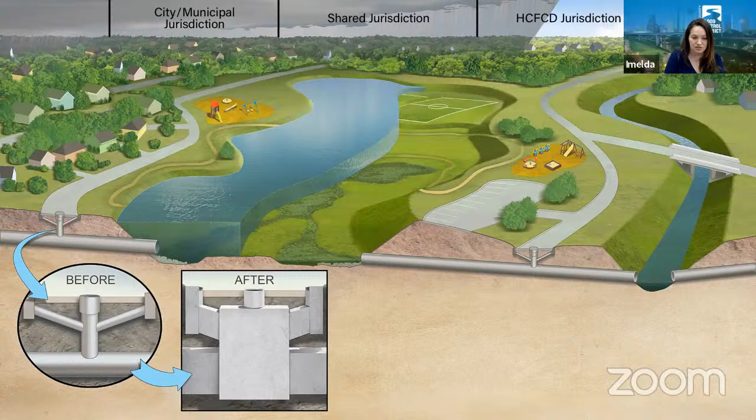In the middle is a stormwater detention basin, sometimes constructed by the Flood Control District. When storm sewers on the left are increased, this creates an increase in discharge. Since it is our policy to avoid any adverse impacts from our projects, detention basins help to safely take in and temporarily store excess stormwater during heavy rain events. Often, we partner with Harris County Precincts, Utility District, and others to add recreational amenities, such as trails to these basins and along our channels.

On August 25th, 2018, Harris County voters approved $2.5 billion in bonds for flood risk reduction projects. This vote followed a series of meetings across Harris County in each watershed, which resulted in a list of what is now 181 bond projects. As of August 25th, 2021, every project included in the 2018 bond program has been initiated, including 8 projects in the Armand Bayou watershed.

A total of more than $1.35 billion in partnership funding has been secured so far to stretch the 2018 bond program even farther. The actual timing of each individual project will depend on a variety of factors, including environmental permitting, right-of-way acquisition, and utility relocation, and in some cases, requirements of a particular grant. That said, project lists and projected schedules are updated frequently on our website.

While the bond was for $2.5 billion, the full cost of every project in the bond table is almost $5 billion. So we made it clear from the outset that we would need funding partners to fully construct the projects in the bond program. As I mentioned, we've had some success so far and have secured more than $1.35 billion in partner funds. This graphic illustrates the many sources of those partnerships, including federal, state, and local funding that the Flood Control District is working to secure for Harris County.

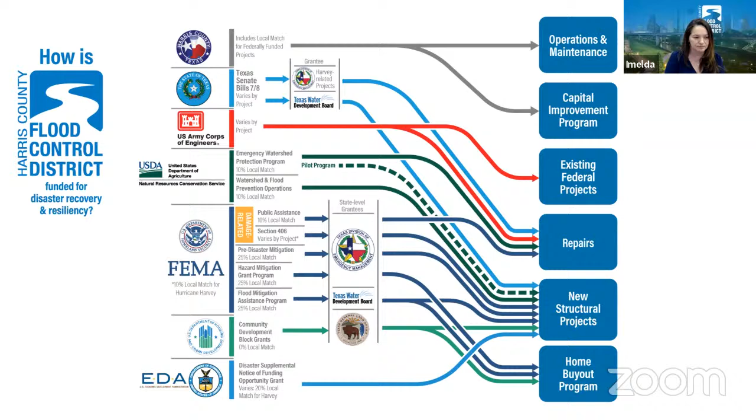Each agency has its own definition of eligible project and its own requirements for local match funding. So the Flood Control District has to work diligently to match projects to the right partnership opportunities. We will now move into the part of the program that is specifically about the Brookglen Stormwater Detention Basin project.

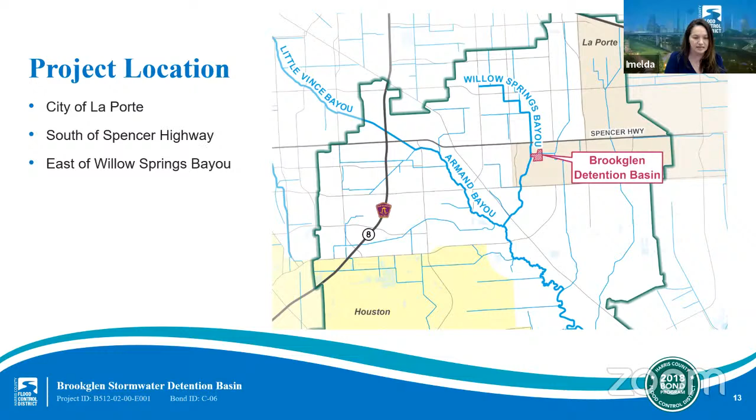The Brookglen Stormwater Detention Basin project is in the Armand Bayou watershed within the city of LaPorte, south of Spencer Highway. The project site is located to the east of Willow Springs Bayou, which the Flood Control District formally identifies as Unit B512-02. The primary objective for the Brookglen Stormwater Detention Basin is to reduce flooding in the Brookglen subdivision as part of a larger drainage plan for the area.

The basin is one of multiple projects that will be required to reduce flooding risk in the Brookglen area. These other projects include the Flood Control District's Genoa Red Bluff Stormwater Detention Basin and future channel and bridge modifications that will increase stormwater conveyance out of the Brookglen area. In addition to those projects, we are partnering with the city of LaPorte on a project that will improve the storm sewers for many of the remaining homes in this area. The detention basins we are talking about tonight will mitigate for the increased flow of stormwater from that future city of LaPorte project.

As most of you are probably aware, this project began as a voluntary home buyout area. Property was acquired from willing sellers who were assisted in moving to safer areas. Following Hurricane Harvey and with funding from the 2018 bond program, the Flood Control District conducted a study which determined a flood risk reduction project was feasible and that additional property would be needed to build one of the stormwater detention basins. The resulting Brookglen Stormwater Detention Basin project is primarily funded by a Natural Resources Conservation Service, or NRCS, grant, which was awarded in 2019.

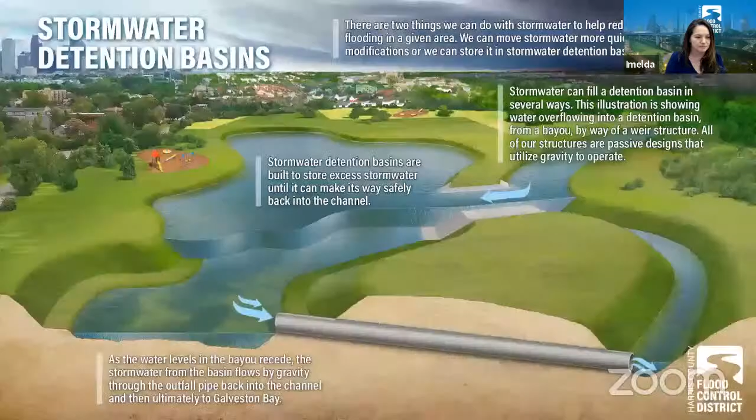Now let's take a look at stormwater detention basins to understand their role in flood mitigation. Stormwater detention basins provide storage for runoff of floodwaters. This storage is temporary and prevents water from overwhelming our channels. When channel water levels drop back down, the stored stormwater drains back into the channel by gravity via outfall pipes, which are appropriately sized to drain the basin. While all detention basins essentially function the same way, they can be designed in many different configurations.

Detention basins can be designed as either wet bottom or dry bottom. Wet bottom basins feature a permanent pool of water at the bottom of the basin. The area from the top of the water to the top of the basin's banks is what we consider available stormwater storage. Dry bottom basins feature a grassy lining and are designed to drain dry between rain events. We are designing a dry bottom basin for this particular project.

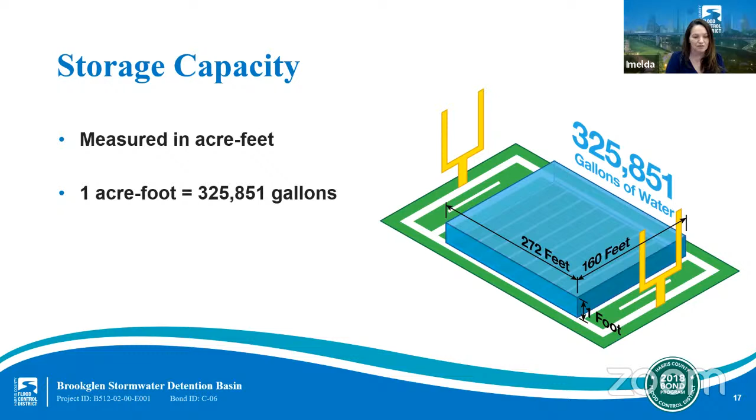When we talk about stormwater detention basins, we talk about how much stormwater they can hold in a unit of measurement called the acre foot. That measurement refers to the volume of water 1 foot deep over 1 acre. For context, 1 acre foot equals approximately 325,851 gallons of water. Think of one football field covered with 1 foot of water. With this context in mind, let's look at the design recommendations for the Brookglen Stormwater Detention Basin.

The North Compartment will provide approximately 13.5 acre feet. That's almost 4.3 million gallons of storage. It is designed to drain dry between rain events via an outfall pipe to the B512-02 tributary to the south. The design avoids major utilities and removes service connections to buyout properties.

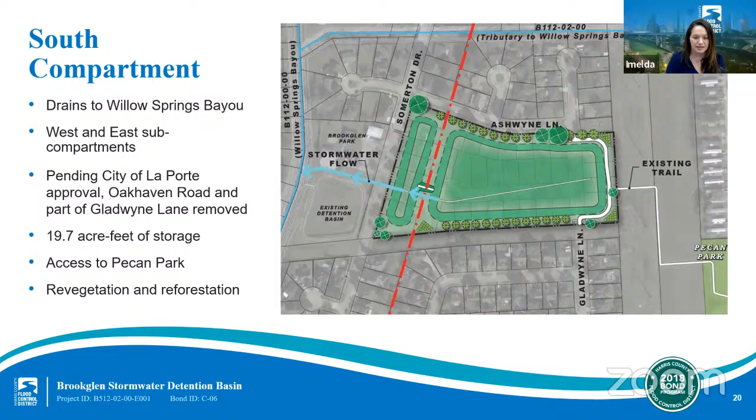This design also will include a post-construction landscape plan, which will allow for plantings to provide aesthetic appeal along Ashwyne Lane. As part of our grant from the Natural Resource Conservation Service, natural restoration of the area is a key component. So we know that this project will conclude with revegetation and partial reforestation. This will be the case for both the north and the south compartments.

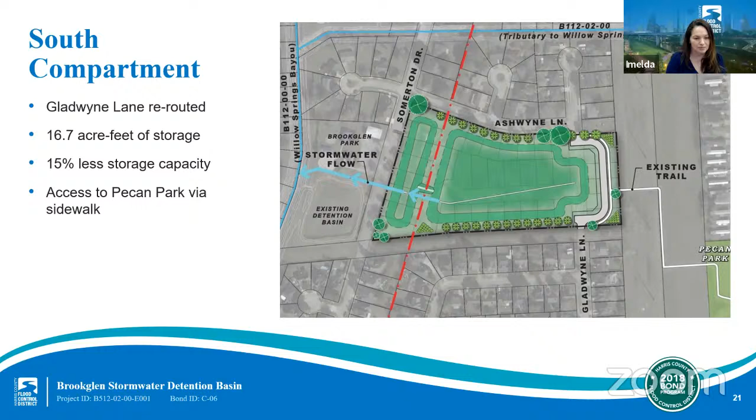In this configuration, the ability of the basin to provide significant flood risk reduction to the area would be greatly reduced. This would also reduce the effectiveness of the City of LaPorte's future storm sewer projects to further provide flood risk reduction in your area. Remember, the City of LaPorte's future storm sewer project needs these detention basins to offset for the increase in discharge that those upgraded storm sewers will provide.

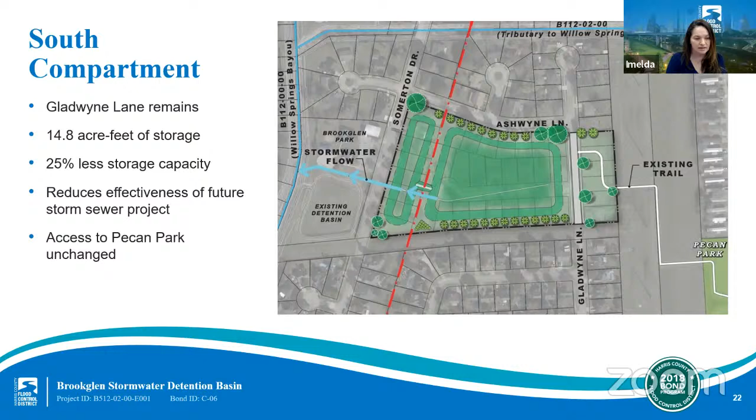With a lower detention volume, that will mean that the City of LaPorte will have to find another location for detention or reduce the scope of its storm sewer project. With Gladwyne Lane unchanged in this design, access to Pecan Park would remain the same as it is today.

I'd like to share a few words now about trails and recreational amenities. We know the Brookglen community is a very active community of walkers, cyclists, dog walkers, and others who enjoy the area's amenities. We've kept that in mind when designing the South Basin compartment and its connection to Pecan Park, and why we've called out those potential changes for you. It's important to know that the Harris County Flood Control District does not construct trails and amenities at our facilities, but we willingly share our property with entities that do.

For that reason, our standards allow us to construct the maintenance berms surrounding a basin from 20 to 40 feet wide, which is wide enough to accommodate future trail installations should a local sponsor decide to step forward to do so. Whenever possible, we are glad for our facilities to support dual purposes, flood risk mitigation and recreation.

Again, the Natural Resources Conservation Service grant we received for this project focuses on restoration. So we plan to include post-construction tree plantings to stabilize the banks, provide shade, improve wildlife habitat, and give this basin a more natural appearance. You can see representation of this restoration along the perimeter of the basin on this slide.

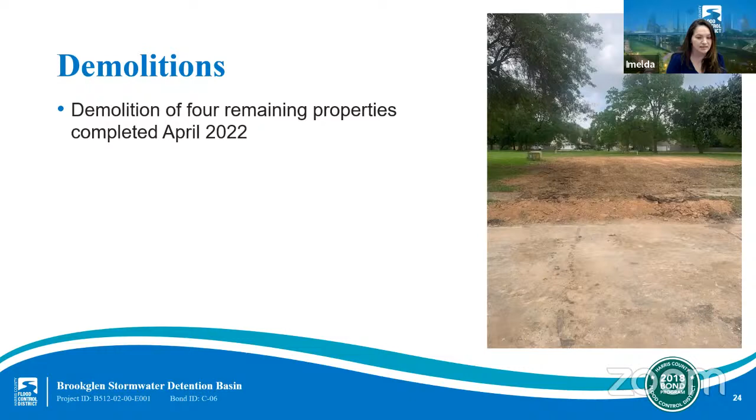So where are we today? As I mentioned, we last presented this project to the public in October of 2020. At that time, the project was in the preliminary engineering stage of the project life cycle, which is the fact gathering stage of the life cycle. The project is now in the design stage. Once the design is completed and approved, the project will move into construction. The Flood Control District plan is to finalize design and construct the north compartment first. This is because of various issues, including obtaining necessary utility permits, which could delay construction of the south compartment.

So let's take a look at the next steps for that north compartment. We expect to finalize design of the north compartment later this summer. We will also submit our street and alley closing application request to the City of LaPorte. That application will need to be approved by the City of LaPorte before construction can begin. Construction of the north compartment could start in early fall and would take approximately 7 months to complete.

So now let's take a look at the next steps for the South Basin compartment. Design for this compartment is expected to be finalized this fall. We will need to obtain letters of no objection from the utility companies in order to submit our street closure application to the City of LaPorte. Again, our application will need the city's approval before we can go to construction. Construction could start in early winter 2022 and also would take approximately 7 months to complete.

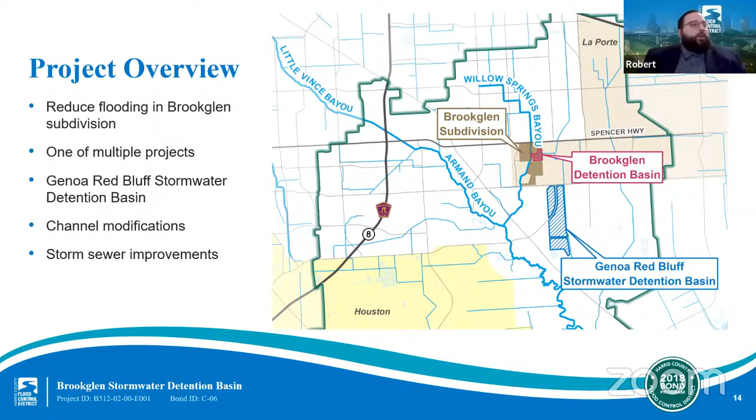All right, thank you, Jonathan. This next question is also for you. What was the reason for not buying out the 17 homes on Ashwyne Court and the 3300 block of Gladwyne Lane, the lots between the north and south basins? Yep, and so that goes back again to the topic of the original voluntary home buyout area. The footprints of the basins that we have now and the buyout areas were determined at that time. And so that's why we have what we have now.

So I'd have to take a look at exactly what those addresses you're referring to are, and I can get back to you specifically on those. All right. Thank you, Jonathan. And this next question is also for you. When is the decision going to be made about the closure and removal of the streets?

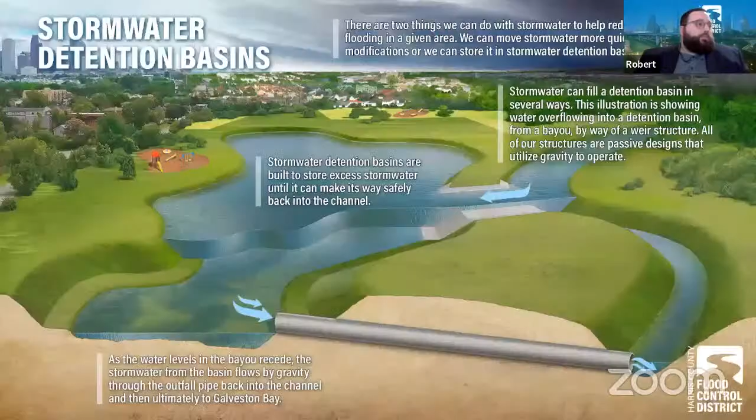I sort of touched on that during the presentation. So the difference is that a wet bottom basin generally includes a permanent pool of water at the bottom of the basin. The area above the permanent pool and up to the top of the basin banks is what we consider available storage. A dry bottom basin, on the other hand, is designed to drain dry and remain dry in between the rain events, rather than maintaining that permanent pool of water that we talk about.

For this project, it's a dry bottom basin. Generally speaking, the wet bottoms do provide a little bit more storage, but it just depends on the project. There's really not one that's better over the other. It just depends on the project.

All right, thank you, Imelda. This next question is also for you. Could this basin become a neighborhood park?

Absolutely. Of course, we would have to have a sponsor. Perhaps the city or the precinct would have to agree to adopt the basins as a park and maintain them. But we definitely do encourage the community to reach out to their precinct representatives or their city council. If you're interested in having that, we will be happy to talk to you about that.

All right, thank you, Imelda. Our next question is for Jonathan. What has changed for this project since the last community engagement meeting?

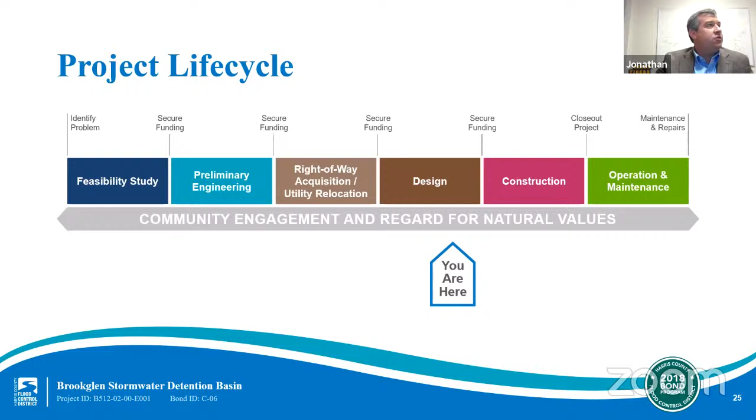So remember, on some of the exhibits, an example would be the south compartment being separated by that pipeline. Actually, if we could go to, I think it's slide 18, we can take a look at the configuration there. In this alternative that we are now designing in the final design stage, you see that in the south compartment, we're crossing under that pipeline that's the red dotted and dashed line.

I bring this up as an example because in our preliminary engineering stage, we look at what's the best way to cross this pipeline. Do we pay to relocate it or have it go deeper to make a bigger basin, or is it better to just cross under it with the pipe? And how do we outfall or connect to our channels in the area? All of those things get worked into that preliminary engineering stage so that we can come up with a plan for what this final design is going to be. And that's what we presented to you back in October of 2020.

Since then, we have been working on the final design, which is the actual set of construction plans or construction drawings. Those construction drawings are what's going to go out to bid for the contractor to pick up and carry the project through construction. Since October 2020, we've come up with this final design, and we've gotten about 50% through it, and that's what we are sharing with you tonight.

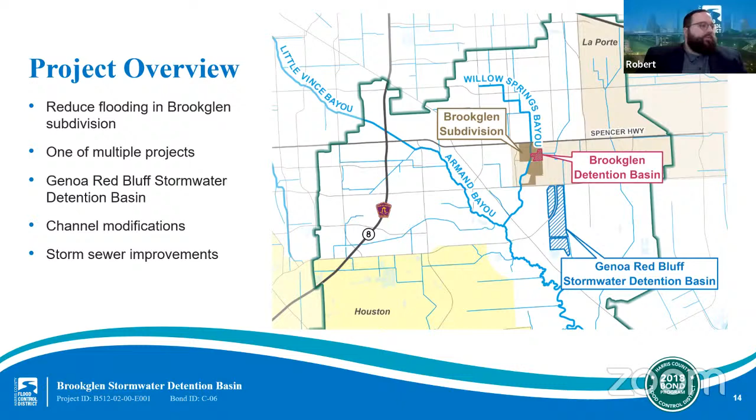Thank you, Jonathan. This next question is for Imelda. Will this project eliminate flooding in this area? If not, why won't it?

Well, it's always impossible to say that this project or any project is going to completely end flooding in any area. However, we do know that projects such as this, the stormwater detention basins, can offer effective flood damage reduction by temporarily storing this excess stormwater. Of course, the project will reduce the flooding in the area, but the risk of the flooding will remain. And our message is always that we recommend that everyone in Harris County and our surrounding areas have flood insurance to ensure against the possibility of any kind of personal and financial loss.

All right, thank you, Imelda. Our next question is for Jonathan. Can you go over again how much stormwater this basin will hold?

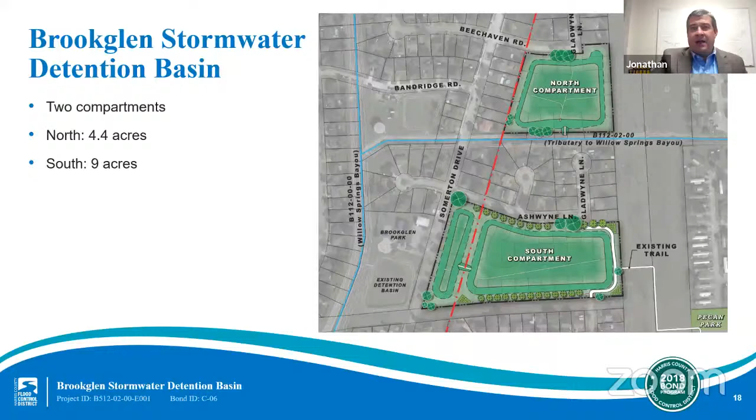Sure. So we've got the north compartment and the south compartment, and the total of those two, we're looking at about 33 acre feet of storage, which is more than 10.8 million gallons. Specifically, the north compartment, we're looking at about 13.5 acre feet of storage, and in the south compartment, 19.7 acre feet of storage. And so if we go back to our football field analogy that we looked at in the presentation, that's about 33 football fields or 33.2 football fields of water for the combination of both compartments.

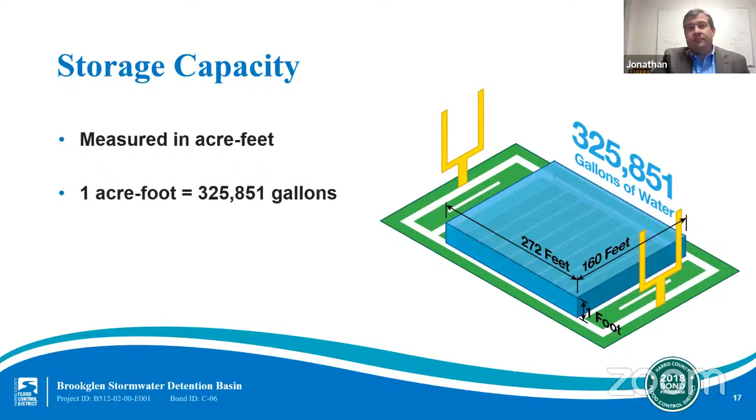All right, thank you, Jonathan. Our next question is also for you. What is the plan for addressing the issues with B112-02-00? Was that one for me? Sorry. Yes. What is the plan for addressing the issues with it?

Sure. So the volume created by our north compartment will keep the floodwaters within the banks of that tributary B112-02. And so that's when we talk about storage volume in these detention basins. I'm glad you asked that question, because that gives us a chance to show that that's the real impact, right? Or the real benefit is the volume of the water is now held in that detention basin. And when we look at what we call a peak water surface elevation in the channel B112-02, following the construction of the basin, the water in the channel is going to be lower. And so in a 100-year event, water will remain in bank in that channel.

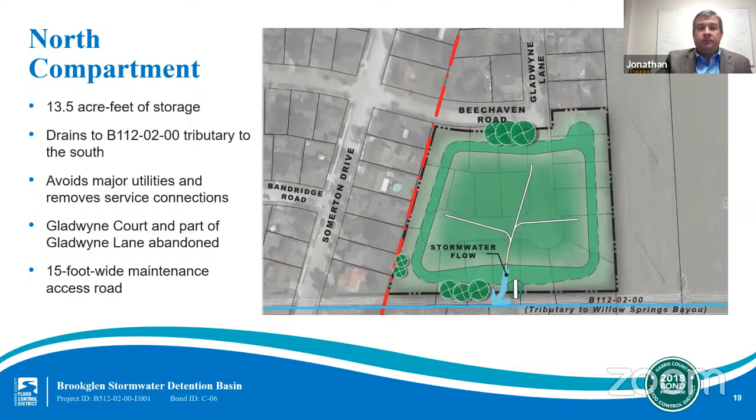All right, thank you very much, Jonathan. Our final question for this evening is also for you, Jonathan. What about hike and bike trails here?

The flood control district does not build hike and bike trails, but we do partner with folks that do. And so following the construction of this detention basin, there certainly is potential to coordinate with entities who would construct or facilitate the construction of those hike and bike trails. And then another quick reminder that this project is funded through an NRCS, Natural Resources Conservation Service grant. And so one of the requirements of that grant is to provide restoration. And so we do have restoration and partial reforestation plans that will take place after construction.

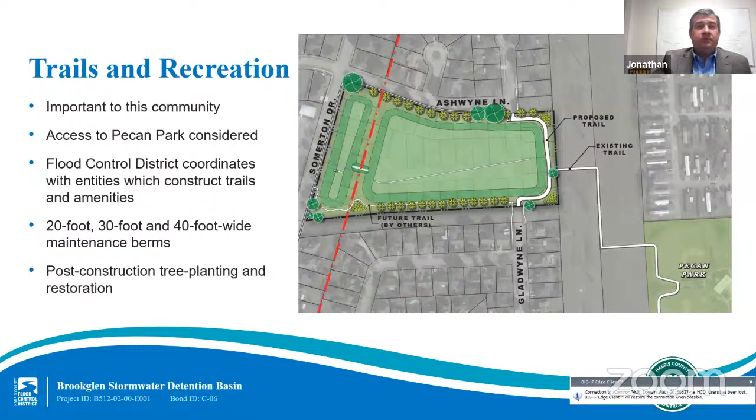All right, thank you, Jonathan. And with that, I would like to share one final reminder that we are continuing to accept comments and feedback on this project through May 19th, 2022. We also encourage everyone to get flood insurance as flood season in Harris County runs year round.